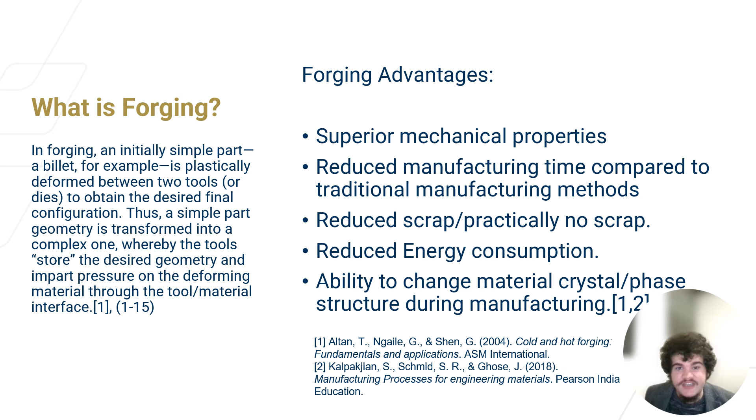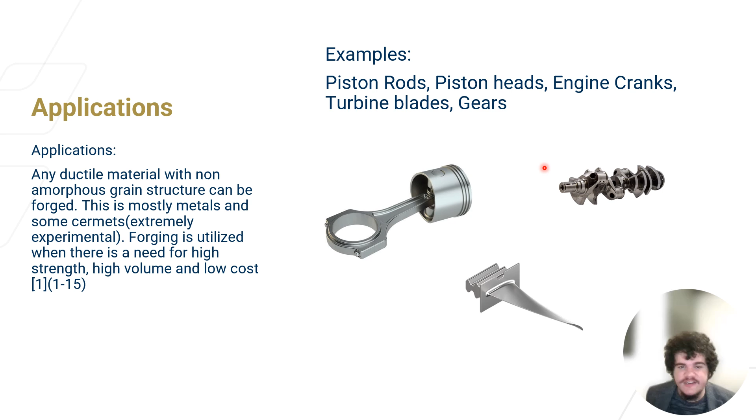What are the applications of forging? Any ductile material with non-amorphous grain structure can be forged. This is mostly metals and some cermets, extremely experimental right now though. And forging is mostly utilized when there's a need for high strength, high volume, and low cost production of parts. One of the main examples of forging is piston rods or piston heads, where they are very high strength materials for a pretty low cost. Engine cranks, turbine blades, and gears, especially gear blanks, are also usually forged.

As we can see in here, if you cast something, the grain structure is very unaligned, so you have incredible amounts of grain breaks, and those grain breaks basically allow you to have crack formation or crack propagation at those points. If you machine something, the machining itself cuts into those grain lines, again resulting in points where crack formation or crack propagation can happen. If you forge something though, the grains will flow with the material's outline and the material's stress flow, which results in less grain breaks and less crack propagation or crack formation at said grain breaks. This is especially important with high fatigue loads, as most crack propagation happens in those cases.

Another advantage of forging is changing the phase and grain structure of the materials. So we go with a pearlite material and we want to get an austenitic material. We can forge at a higher temperature, we can get the material property we want, and we can quench at that point to get the material property that we need. Also, the recrystallization allows us to go for finer or rougher grain sizes, which is again an engineering parameter that we want to utilize to get better products.

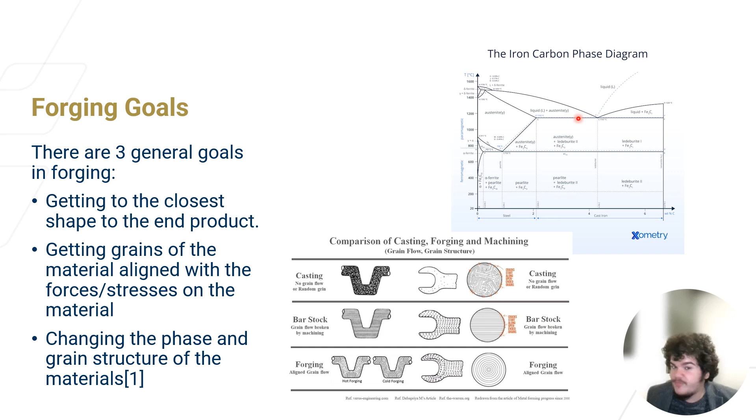What are the forging methodologies used in the industry right now? It can be dependent on basically three factors: temperature, die geometry, or force application. With temperature, we have hot, warm, cold, and isothermal forging. Hot basically means that we are above recrystallization, warm means we are at recrystallization, cold means we are below recrystallization. Isothermal is not about the material itself, but the die temperature. For all of these processes, the hotter you go, you have finer grain sizes, less strength, but more ductility. The lower you go, you have more strength, less ductility, and coarser grains. And also the forging forces increase the colder you go.

Based on die geometry, open die, closed die. Very simple. Open die results in very cheap to manufacture dies with low precision, and you need to have a lot of post-processing. Closed die, you can go very complex dies, which is costly, especially for singular runs, but you do not need to do that much post-processing. Based on force application, kinetic or static. Static, or presses, allow you to have better deformation control and better force control, while kinetic application allows you to have higher final impact forces. So harder to process materials are usually done kinetically.

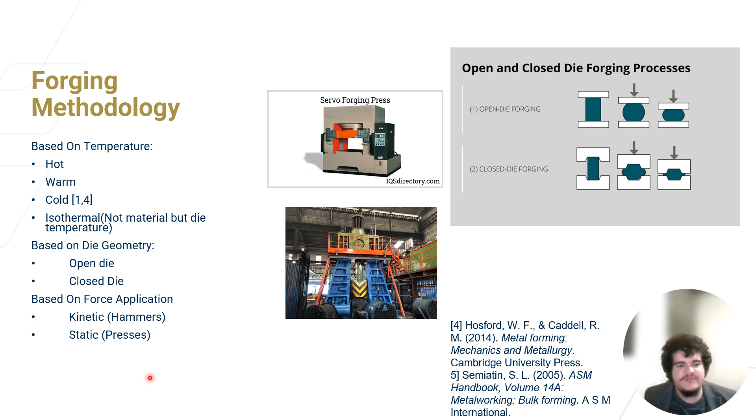What are the skill sets needed in the forging industry? There are basically four main skill sets needed in the forging industry, especially as an operator or equipment designer. You have to have a very good understanding of material behavior and plasticity. Methods such as the slab method and plasticity models such as Johnson-Cook, Hollomon, or Swift really require you to understand which material properties you're working with, which material conditions you're working with, and how those are going to be applied to your final product.

Another thing you have to understand is reading phase diagrams, understanding grain structures, grain propagation, and these kinds of material science parts of the forging process, as your end product is basically dependent on those properties and those phenomena. Another thing that is very important right now, especially in the forging industry, is understanding of heat transfer.

Heat transfer between die and material, and also heat transfer in actual heating processes. Industry is very much inclined to go towards induction heating rather than conventional heating methods, which requires you to understand heat transfer to get a consistent thermal profile across your material, as induction heating basically generates heat on the material itself rather than just heating up to a certain ambient temperature.

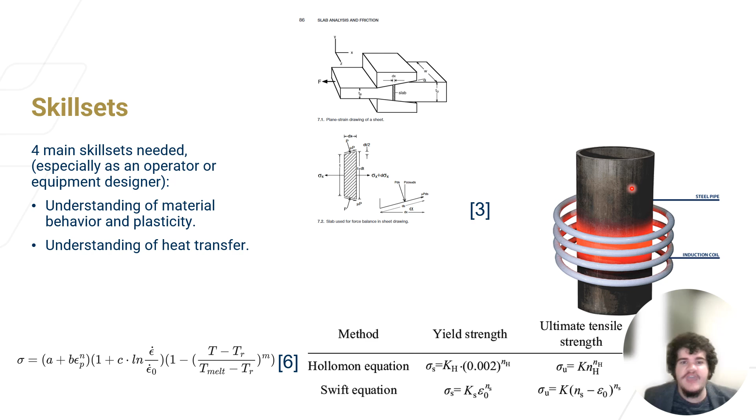Two other skill sets you really need in the forging industry right now are understanding of empirical models and data analysis. In general, while we are doing forging, things such as your friction factors are determined based on experiments, empirical models based on those experiments, and data analysis of those experiments. So you have to be really competent at designing experiments, understanding said experiments, and doing data analysis and empirical models on said experiments to be competent as a forging engineer.

Another thing is you have to understand FEA, especially with complex dies in modern working conditions and modern research, such as what I am doing right now in my forging lab. You have to understand which FEA models to go for, explicit or implicit, based on force application basically. Implicit really works well with presses, and explicit works really well with hammers.

Or what you should do with your plastic deformation: you should go reduced or unreduced. How you are going to rein in plastic deformation, or how you're going to rein in hourglassing. All of these things require you to have understanding of all of the skill sets we talked about before, and also understanding how the FEA systems work themselves individually.

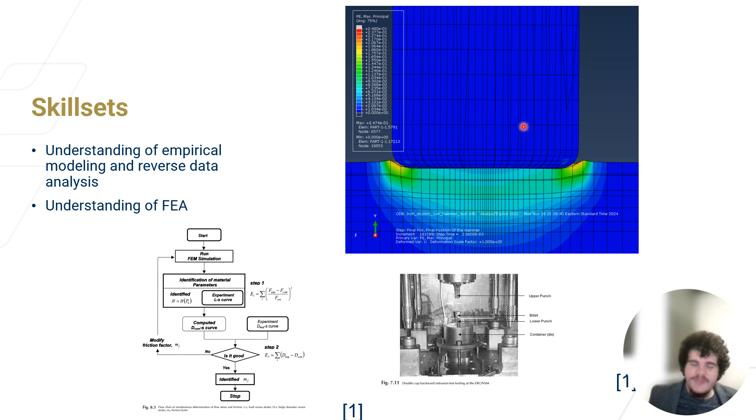So what are the future trends and innovations in forging in general? One of the main ones is metamorphic manufacturing. Metamorphic manufacturing is the idea that we can use sensors, thermal control, actuators, forming tools, robotic manipulation, and computation, all of these to create incrementally forged parts with different properties at different parts of the part.

The idea with metamorphic manufacturing in general is you have a very specific end shape that you want to go for with very specific material properties at very specific points, and you are controlling every little stroke based on that. So this is the main goal of most of the forging research right now in the industry.

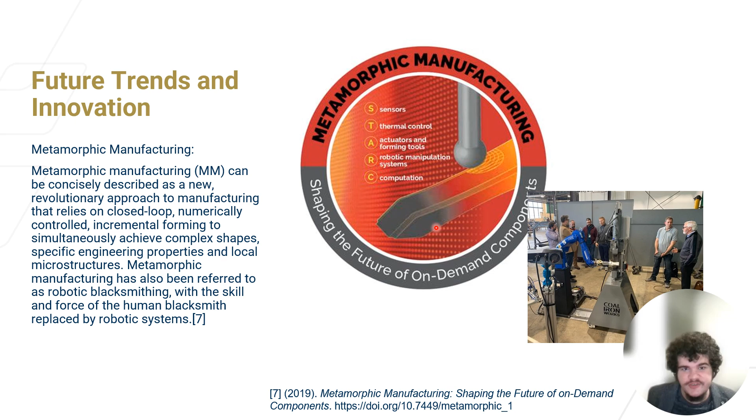Other future trends and innovations in forging include flashless forging. Flashless forging, especially with closed die forging, is the process of forging with no flash or scrap on the forged material itself. It reduces post-machining time immensely, and it is very favorable for manufacturing. However, it requires immense amounts of engineering time, FEA work, and very precise dies. So right now, it is very much limited to only high volume, high value productions.

However, especially with how the industry is trying to innovate and trend towards there, a lot of the low volume productions, I think, are going to be in flashless forging too, and that's what the industry magazines mostly talk about as well.

Another thing is scaling reduction and mitigation. Scaling happens when oxidation happens in forging processes, especially with open die forging, and it is bad for you because it reduces material strength and it messes with your material properties. So coatings or vacuum processes to get rid of or mitigate scaling have been very popular research topics in the last couple of years.

Crystal plasticity has also been a very popular research topic. Anisotropy or lack of anisotropy is a very important thing in forging. We can create, especially with modeling and understanding crystal plasticity, anisotropic material properties with forged materials. So you can have very high strength in one direction and very low strength in another direction.

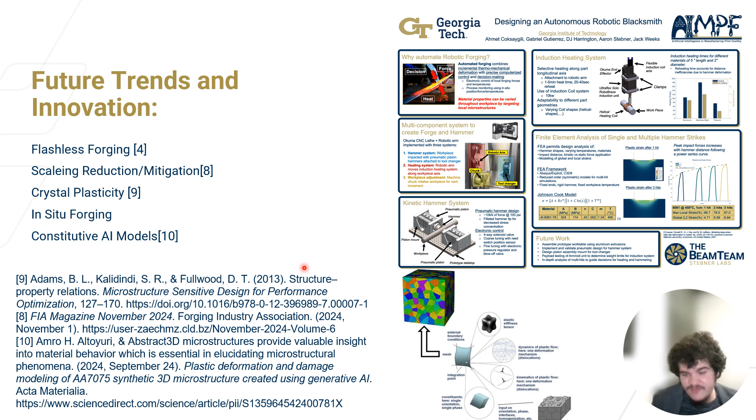Lastly, constitutive AI models have been very popular as well. Forging usually requires high amounts of FEA work, especially for complex dies. But we can train AI on simpler FEA models and get AI predictions on how the complex dies are actually going to behave. And based on that, we can get rid of a lot of the FEA work that we need, to have very fast manufacturing.